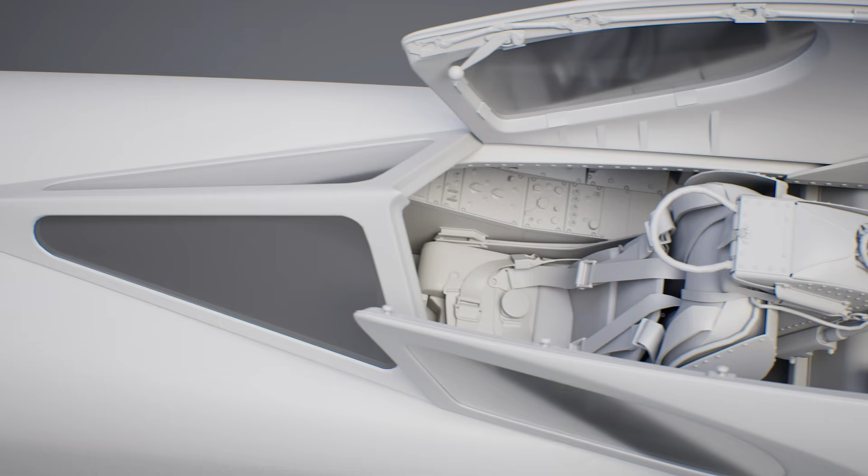As you can see, we've made major progress compared to our last video update. The external model is fairly complete in terms of the fuselage, minus some smaller details like the ailerons being fully modeled and the rudder. All this amazing work on the fuselage has been modeled by both our main 3D modelers, Knees and LazyLime. You may have also noticed that the engines are now added into the 3D external model, which has been fully modeled by Knees as well as animated.

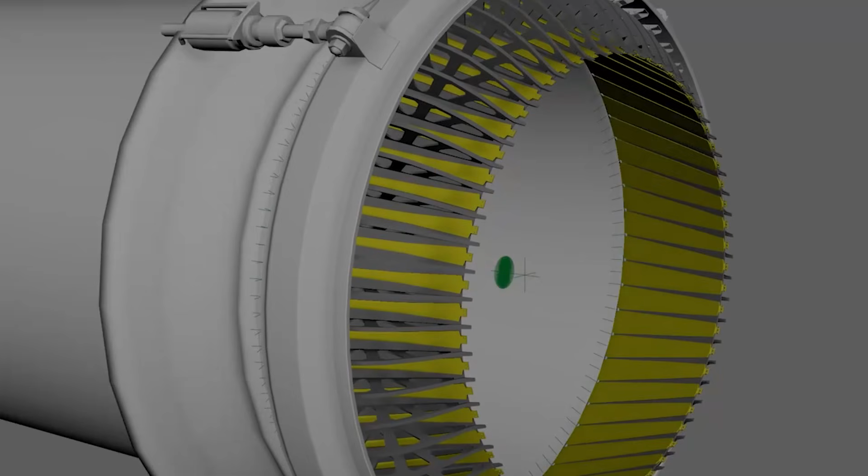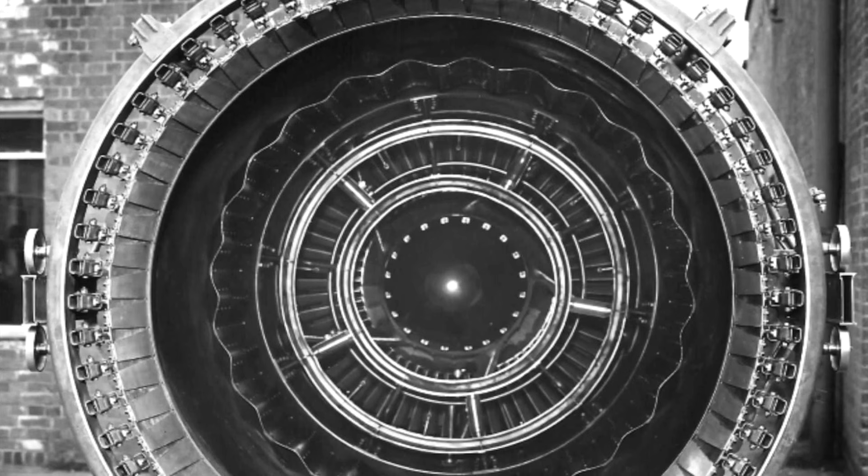To show the amount of work that goes into this 3D modeling, Knees had basically only two good references for the engine: a side photo of the engine, as well as a black and white photo I found from a video with 130,000 views uploaded 7 years ago. It was a huge random algorithm pull that saved us a huge headache. I'll be dropping the video link down in the description if you want to check that out.

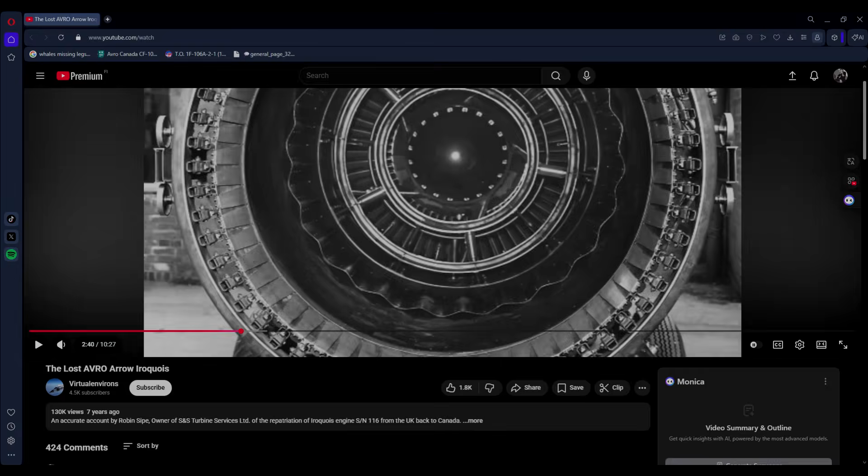Currently, Knees is working on the external model and all of its animations for us to move into DCS for programming of the EFM flight model in the coming months.

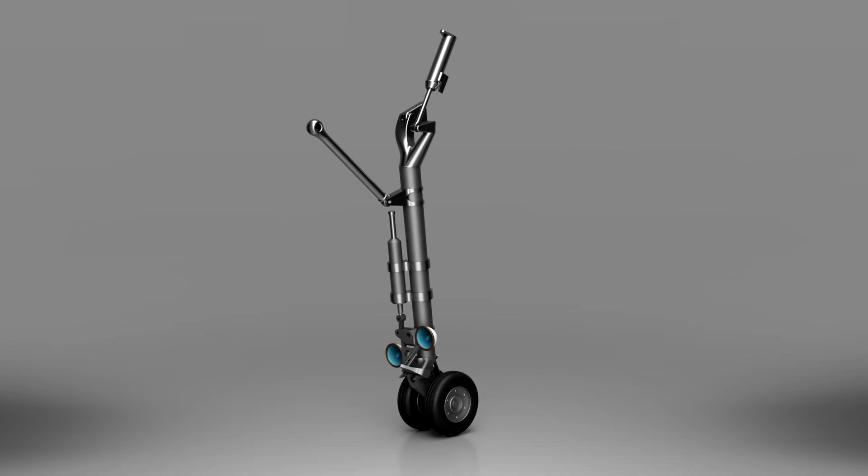LazyLime has currently finished the CAD models for both the nose gear and the rear landing gear. He also did some rudimentary animations in his CAD software to show us the nose gear in function. These are currently being added to the external model as we speak.

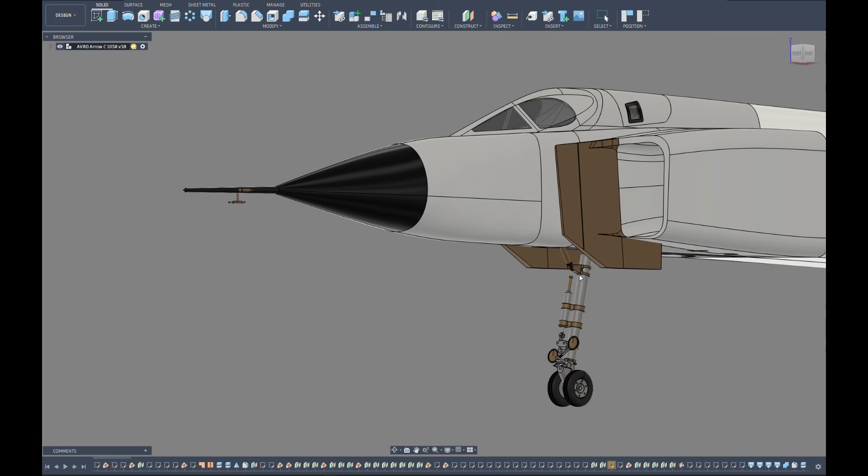There has also been some minor CAD modeling for the weapon system pack for the CF-105's missiles, that being the Sparrows as well as the Falcon 4s that it will be using.

As for the cockpit, there hasn't been any modeling done in a few months, as our main focus is to get the external model imported into DCS for the EFM programming.

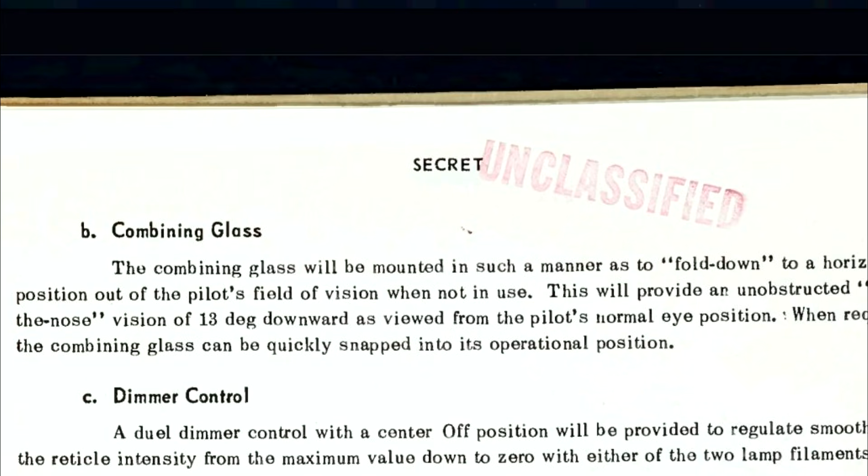After rereading the documents, I realized what they were describing was an entirely different optical sight that would have been only used on the CF-105. I asked multiple historians and museums about this, and they honestly had no idea what it would look like or anything about it beyond a basic photo scribble and a basic description.

Now, I don't want to bore you with all the details of my schizophrenic writing, research, and math written in this notebook to figure out what the engineers were even talking about, but in short, the optical sight is basically a pair of binoculars spaced far enough to see around what I call the big fuck-off beam. Very scientific, I know, with an illuminated ring and dot in the center.

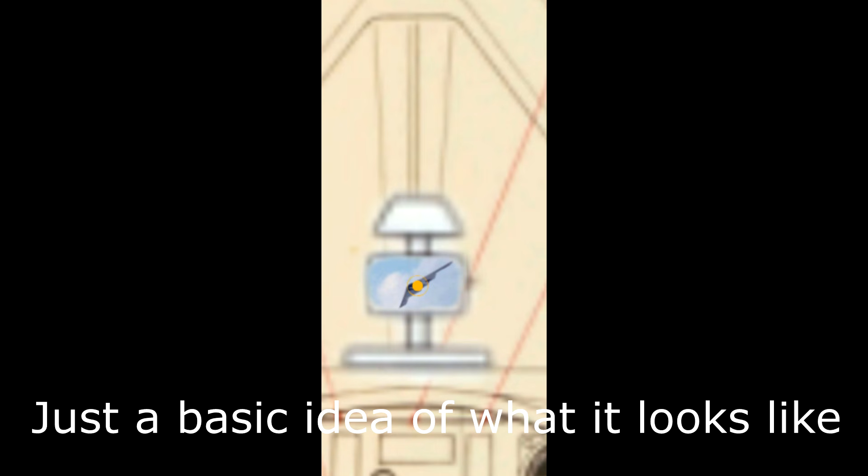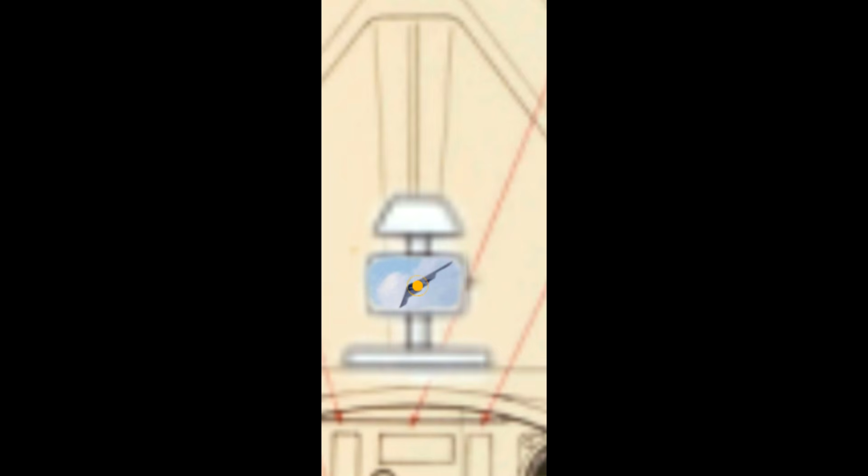But due to the way this optical sight works and an illusion created with your eyes, it causes an infinite mirror effect with the optical sight. Now you may be asking, but future, that sight is still going to be in my way for landing and is still going to make it hard to see. And to you I say, shut up. Because the engineers at Avro decided, hey, what if we had it rotate to the left under the glare shield so now you have full visibility out in front?

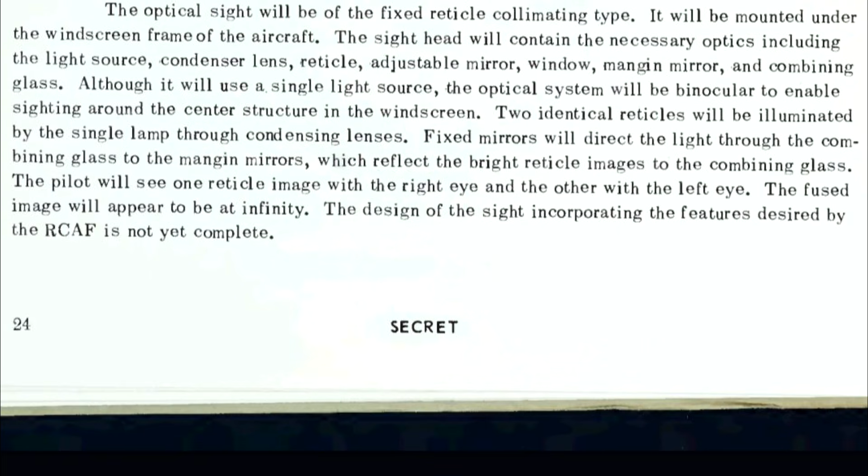Well, more visibility. While my schizophrenic research on the optical sight was being done, our other researcher Kraken has been doing his own research in regards to the air cart and power supply unit for the CF-105.

He had been calling museums and Avro historians, and no one could tell him an answer as to what they were, probably because no one has bothered to ask, because for an aircraft they don't seem all that important in regards to the airframe. This led him down a rabbit hole about this Jeep that was plugged into the airframe and kept turning up empty. But this is when he had a breakthrough.

Canada was using the M32A. You may be familiar with this as it's the same one used by Heatblur's F-4 Phantom, and it meets the requirements for the CF-105's power startup needs. It also happens to look like the exact same one put on the back of this Jeep.

Very cool. He also found the air supply unit that the CF-105 would be using, that of the MA-1A. So eventually we are hoping to have this modeled in the future so you can see your aircraft plugged into these during startup. This may not be on release, but as stated, in the future.

We are currently done with the majority of the research needed for the CF-105. There may need to be some small tidbits of research for modeling in the future, but research will ramp back up as we start working on the flight model.

We as a team have decided that this will not be the last aircraft we do, and both Kraken and I are actively researching a new airframe that we hope to be able to present to ED as a third-party module. We want to be pretty tight-lipped about this airframe, so no more information will be provided during this time.